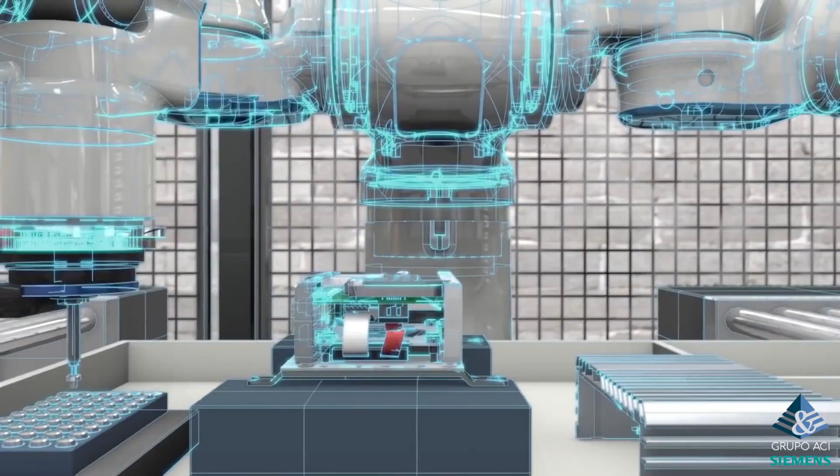It's important to consider things like welding standards and material costs, but also to get the job done quickly. With Solid Edge, you can accelerate your design with specific tools for frames and welding. Let's take a look.

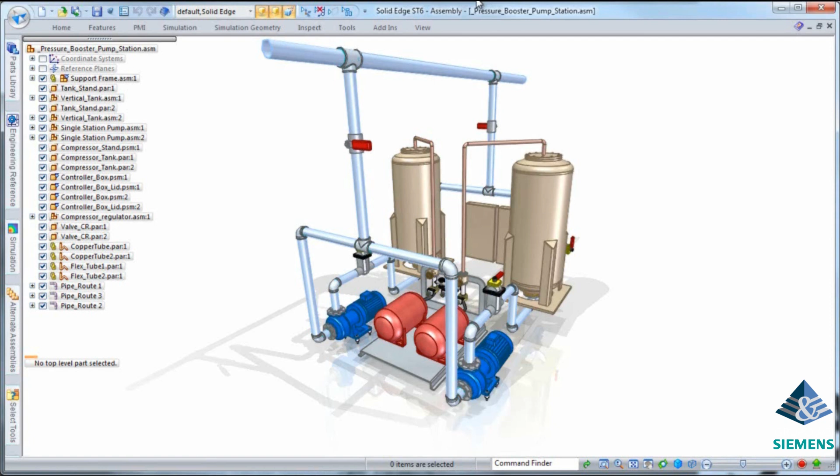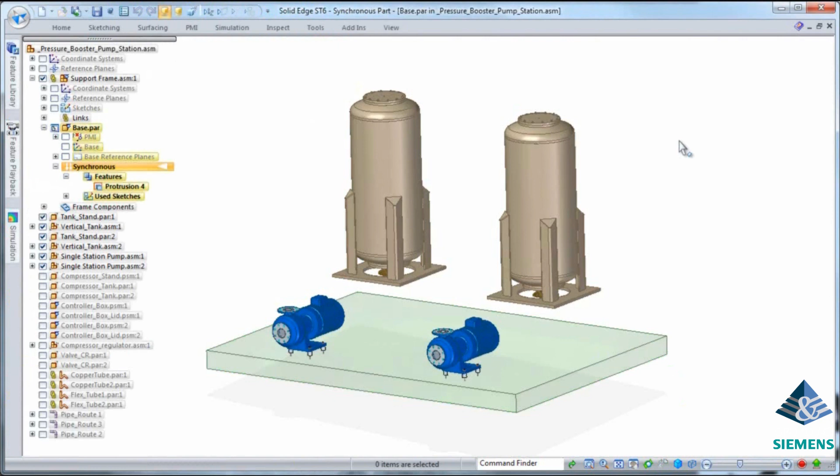Here we have a pump assembly that needs to be supported by frame design and then finished with detailed weld operations. We'll begin this frame design by developing the supporting solid from which the frame pieces can be created. To reduce clutter, you can first turn off the parts not needed for this task using predefined display configurations. Notice the base solid in our design supports the blue pumps, but we need to add support features for the holding tanks. We can create the features using the information already in the assembly. This protrusion feature provides the options to omit internal loops, which are what we are using here.

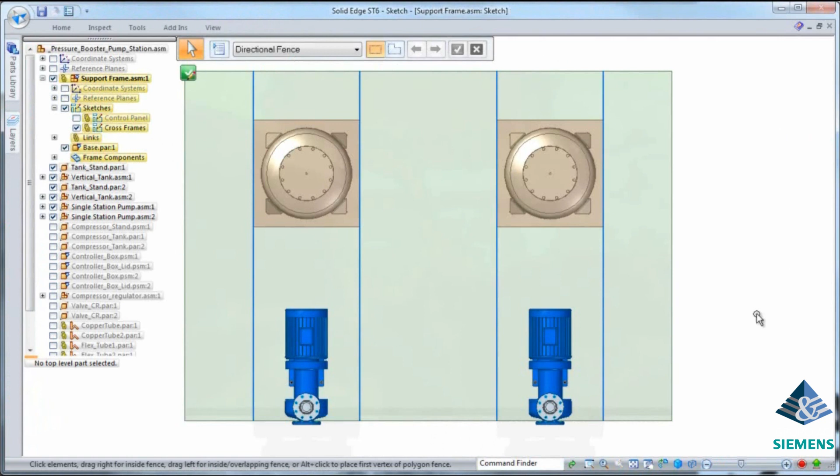Not only can frames be created from solid geometry, but also from simple sketches. In this case, we need to add a couple of lines that run below the pumps. Notice how easy we can pick up the center of the bolts from other geometry in the assembly to make sure that our framework is in the correct position.

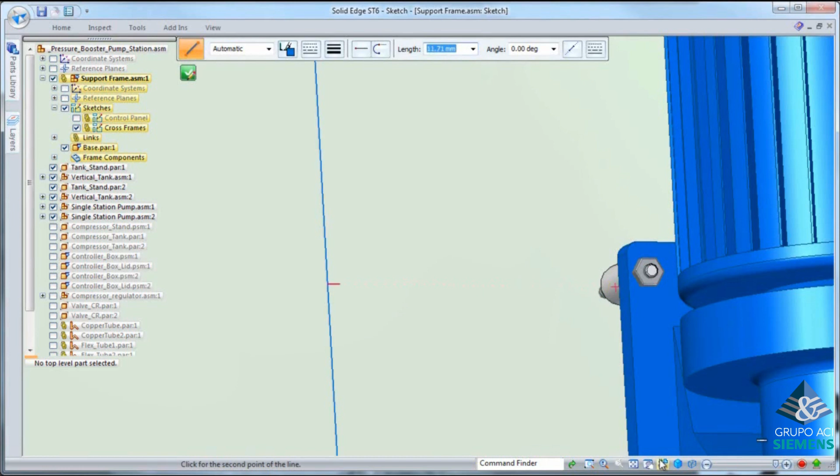The sketching environment gives you great visual feedback during sketch creation to let you know when the geometry being created is point on, horizontal, and so on. Now, of course, we need a second supporting frame, so we'll create a second line using the same techniques as we did with the first line.

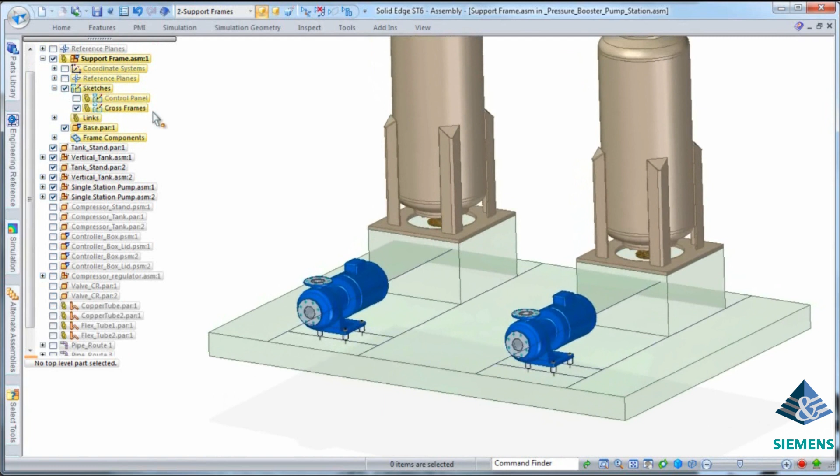Then you can simply drag across them both using the trim tool in the center to trim the sketches not needed away. Once completed, the solid and sketches can be used during frame development to ensure their fit and position within the assembly. The next step is to create the actual frame from this information.

Some of the frames have already been created just to save us some time. Now, the bottom frame was created simply from the general solid edges we started with. As we continue our design, you'll see how this works.

Now, first, you can add the main framework across the bottom. These are the large pieces that support the entire pump station. Notice as they get created that Solid Edge will automatically trim them back where they meet the outside of the frame. And as we zoom up, you'll see that.

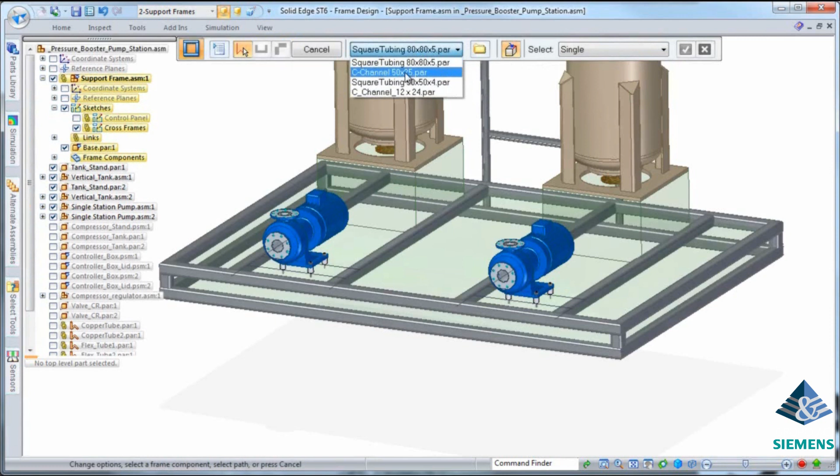Next, we can change the frame selection to C-channel that the pumps will connect to. One advantage to Solid Edge's frames is that you can modify the location of the frame once it's placed. So the first thing we'll do is get these frames created.

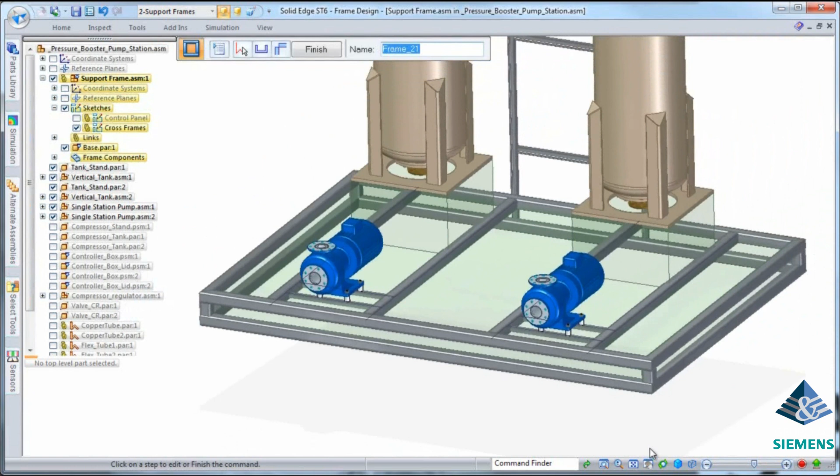We'll go ahead and turn off some of the parts so you can see how this is actually going to work. You can adjust the position through either a key point. So if you just select the actual key point, you'll notice it'll give you feedback on the cursor. Or you can simply select a point from the sketch and you're in business.

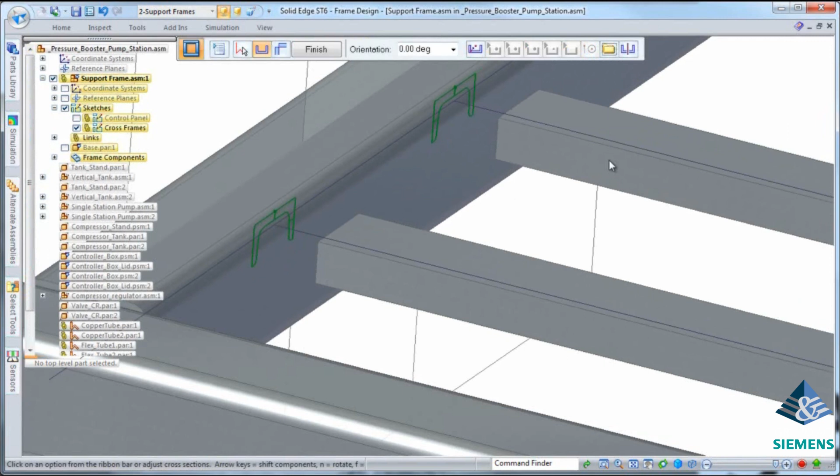You can also create your own custom frame cross sections from a simple 2D sketch and use them within the frame environment as well. In this case, we'll lift up the frames to meet the pump feet.

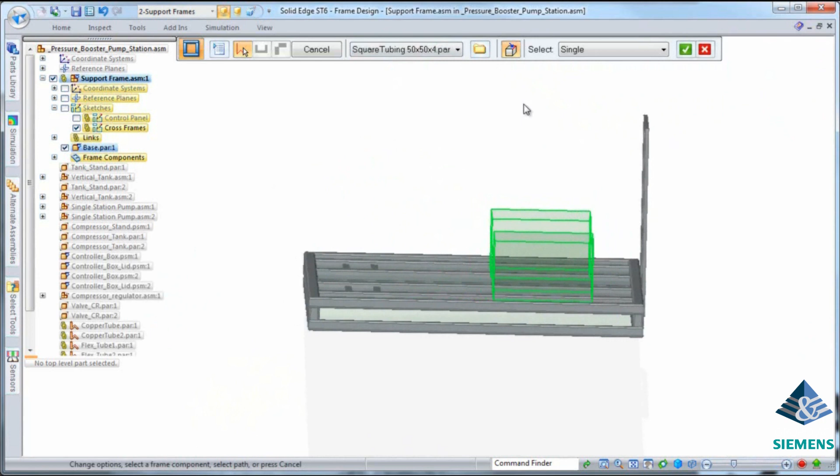Now, the benefit of using Solid Edge for frame creation is that the edges of the solid can be used for the frame path, just like the sketches we just used. Notice here, you can easily fence select where you want to create the supporting frames for the tank. If any of the edges need to be removed from the select set, such as the bottom pieces, simply deselect them with the fence like you just saw.

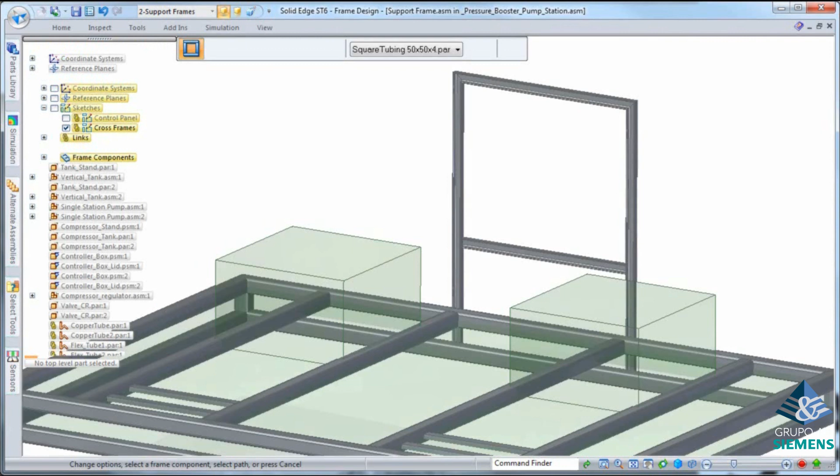Now we can apply the frame piece we want for this area of the design, and Solid Edge will go to work creating the framework for these supports. A big time saver is that you don't have to worry about manually trimming each of the frames to match their other frames in this particular design or in any design. As these frames are created, they will automatically get trimmed back to match up with the actual current design that we have.

Also, notice on the top how the corner pieces butt against each other. Options are available for you to select the corner treatment that you need. In this case, we will switch them to mitered corners, and notice how quickly they update.

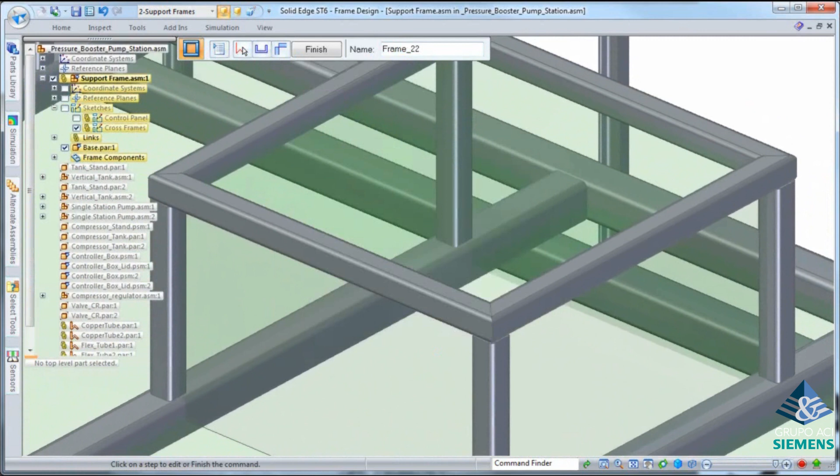Another issue here is that the tank stands are mounted to the top of the solid, so the frames need to be adjusted downward to be at the same level. Now the tool bar that pops up at the top provides quick access to the changes you need to make without a lot of hassle.

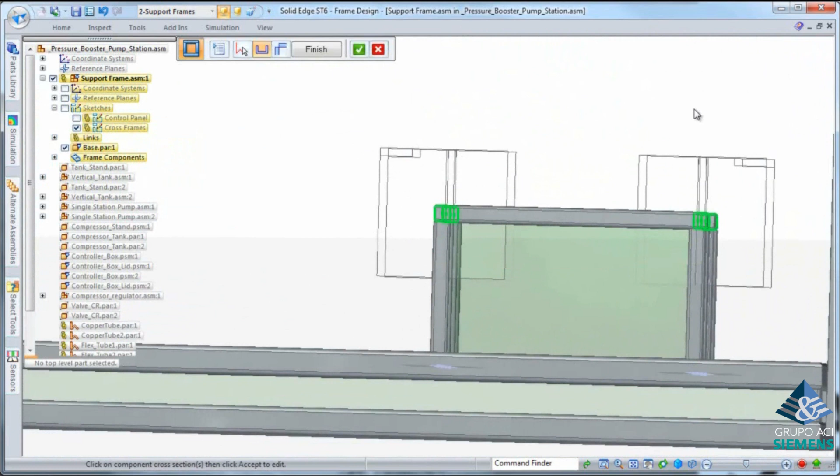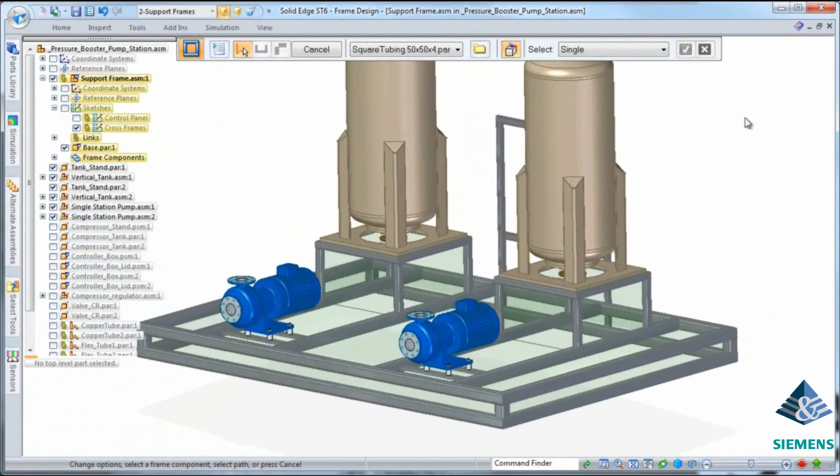Simply identify the cross sections to change, how you want to change it, and watch the top frames drop down into the correct position. Notice after we drop the frame height down, the tank stands sit on top of the frame just as they should. The final frame that needs to be created is the cross section on the back where the panel connects.

This frame structure needs more strength, and this cross section will help provide that strength. One of the biggest advantages to using Solid Edge for frame design is its automatic recognition of other frames in the design to achieve the proper trimming needed to make everything fit.

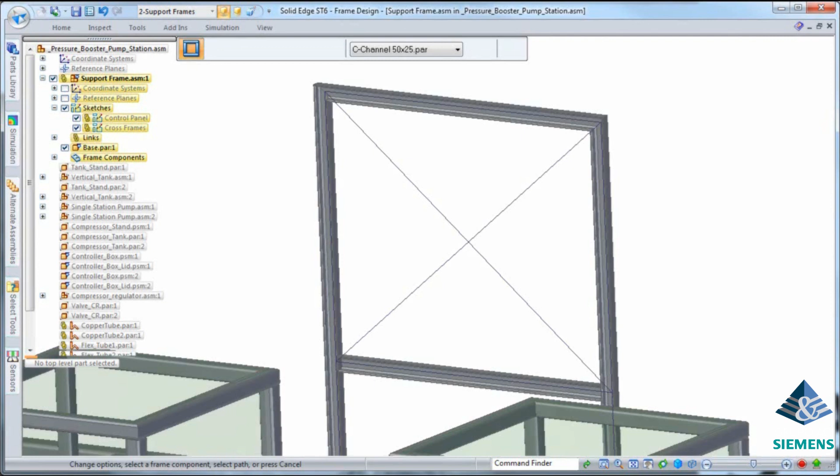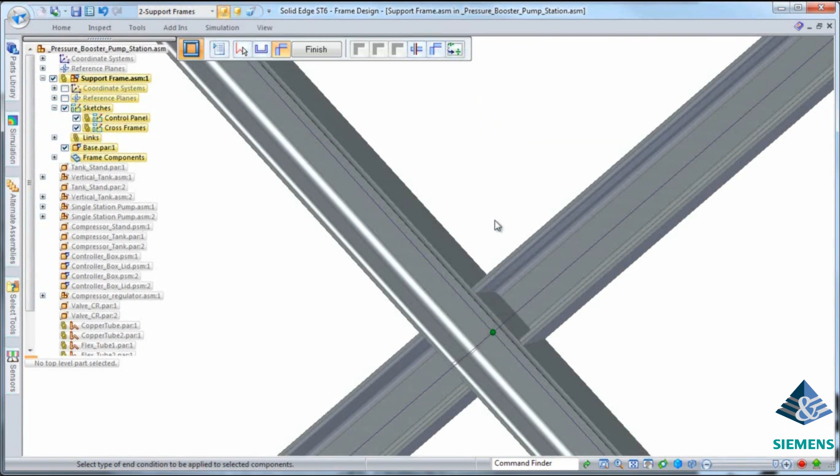As we create these frames, also notice that it recognizes that one frame is a solid piece and the other butts up to it. If this is not the result you're looking for, you have the option to edit the end condition and change which piece should be the solid piece. It's that simple.

Once we have the frame design we're looking for, we're ready to apply the weld features to our framework. Solid Edge provides the option to mark this frame assembly as a weldment assembly, a single unit made up of multiple parts or frames.

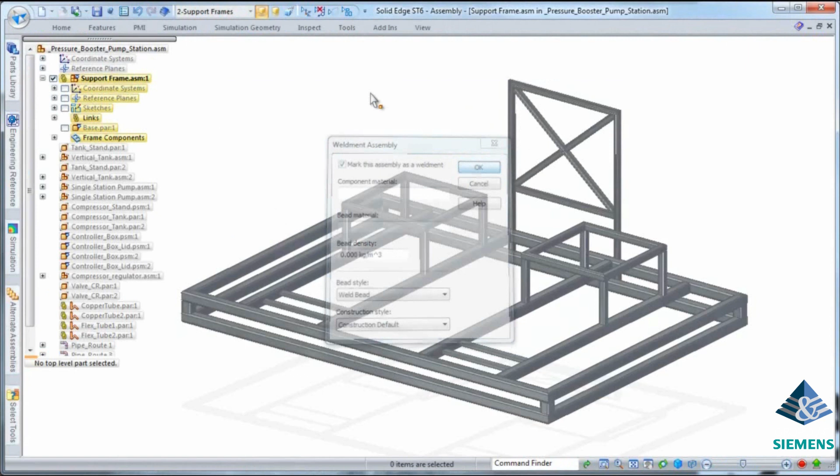Once this is done, you have several options for placing weld bead information to your design. Let's take a look at a couple of the most commonly used weld bead options. The first is to place a fillet weld to the frames that support the pumps.

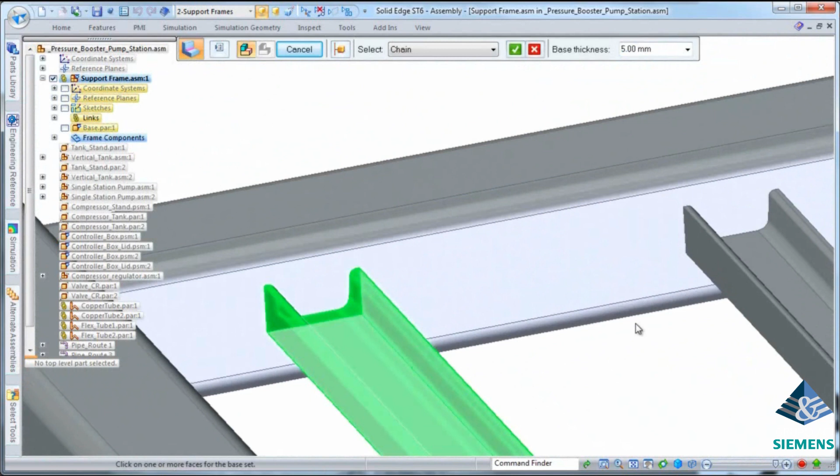Here we're using a 5mm weld bead by just identifying the base set of geometry, the C channels, and then the target geometry. Once geometry selection is satisfied, notice how quickly the weld beads are created.

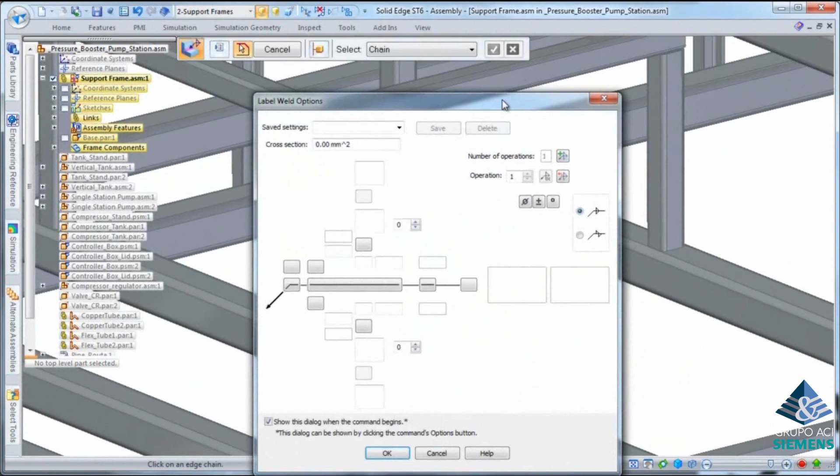In many cases, you may not want to spend the time to create the actual weld beads, but instead just apply a label to the areas where weld beads need to be applied. For this, Solid Edge offers the label weld command, which lets you define what type of weld standard you want to use through this advanced interface.

After you've set it up, just as simply at that point you can click the OK button and identify where you want to apply the label. In this example, we just apply the label weld to the bottom of these posts to show you how it works.

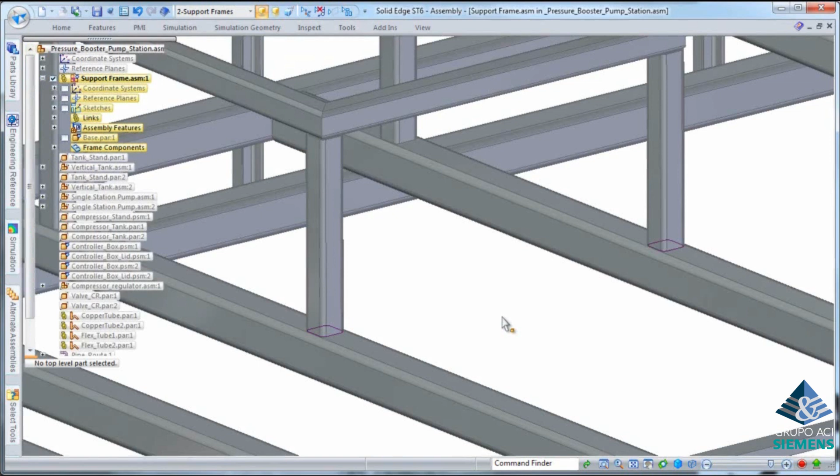So in just a few minutes, we've created several frame structures to support the pump station components, and we've seen how easy it is to apply weld information to the design.

The last step in the process would be to take our design into the draft environment, where you can develop a detailed drawing as well as a report of the parts used for the support assembly. Notice we can do this directly from within the assembly environment.

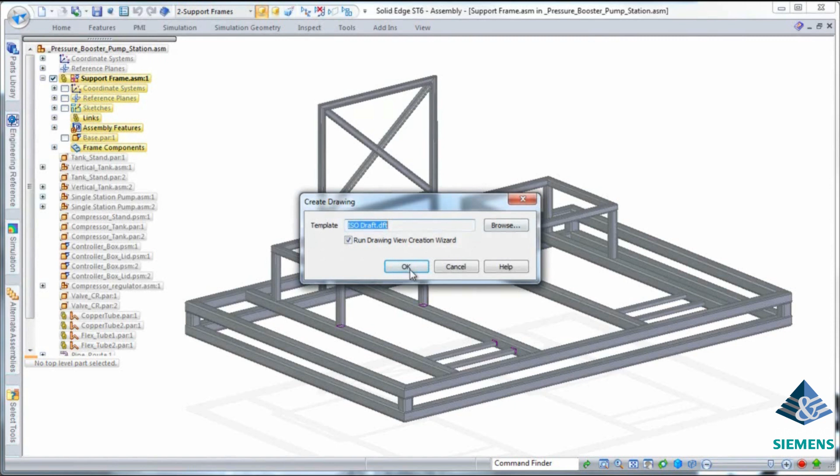As you do this, you have the option to select a standard company template. Notice that the assembly automatically is placed on your cursor, ready for placement, so there's no confusion to what gets placed and where. Before placement, you have several options on the toolbar to make sure you get what you want easily. After placement, we're ready to begin documenting the design.

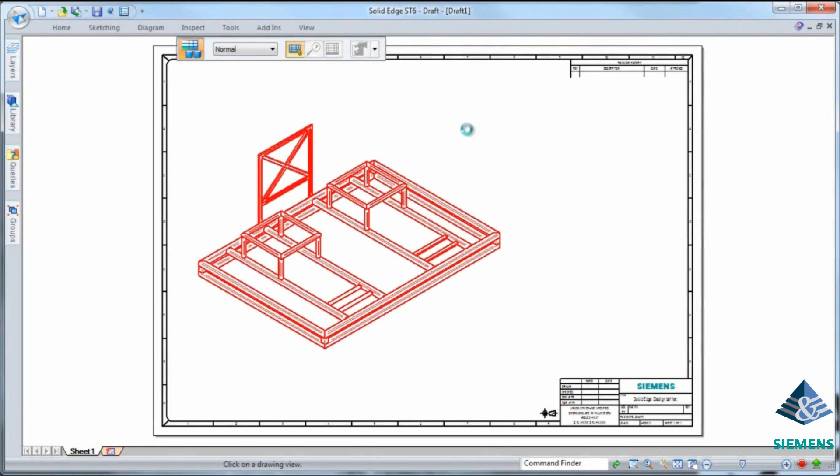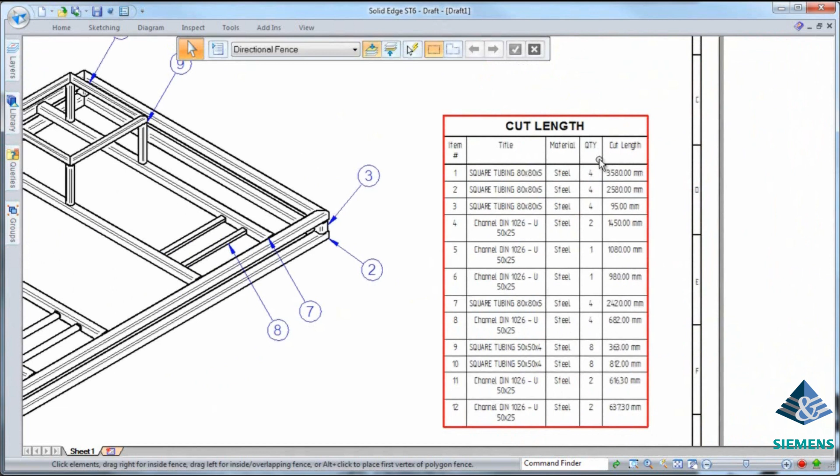We can select from any number of standard or custom created parts lists. As the list is placed, associated balloons are added and their location adjusted easily. This list includes things like title, material, quantity, cut length, and even miter cut angles. If you need to edit the list, a simple double click and direct changes to the list can be made.

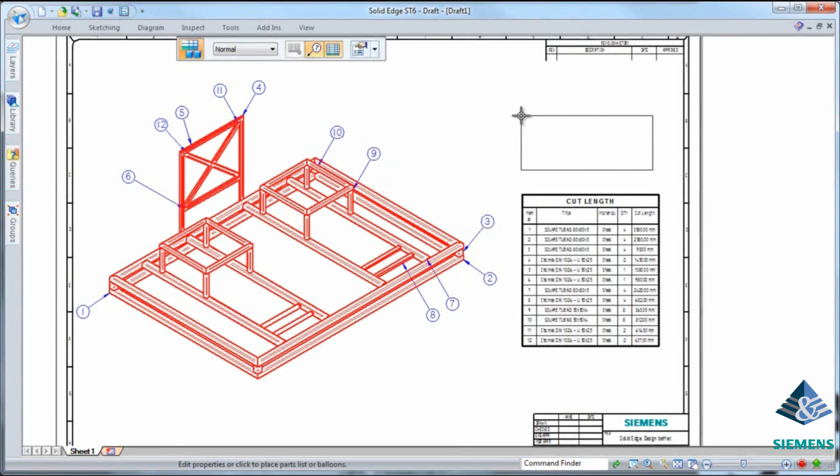You may also want to create another list that gives you total lengths of the components you use, such as this list. Notice the list can be customized also, such as where we can add material to cover rough cut and clearance. Basically just a click and go into the properties, and in this case we'll add 5mm. Easy as that. Once added, the numbers in the list will update to the change.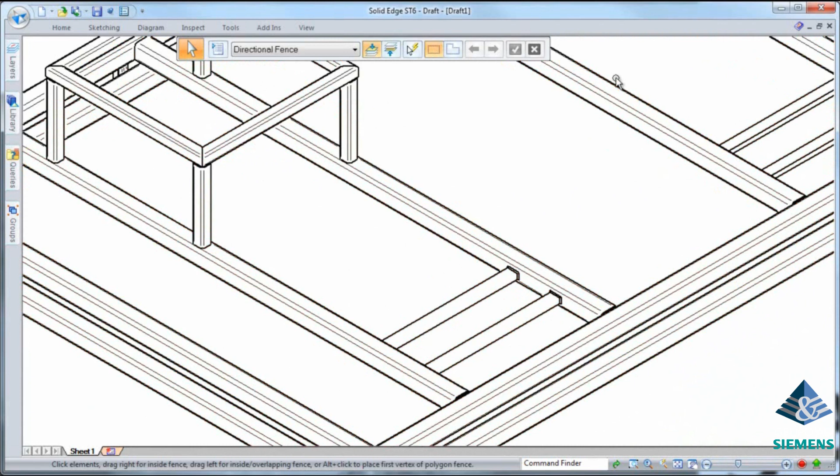The only thing left to document is the weld beads that were added in the assembly. Solid Edge provides the tool to extract weld bead information so you can document how this frame needs to be welded together. In both cases, we are getting the information from the design, so we know it is accurate and what the designer is asking for.

So you can see how easy it is to design frames using Solid Edge. You also saw the great tools for adding weld details and of course documenting everything in a drawing, most of it automatic, ready for manufacture. Another example of accelerated design.